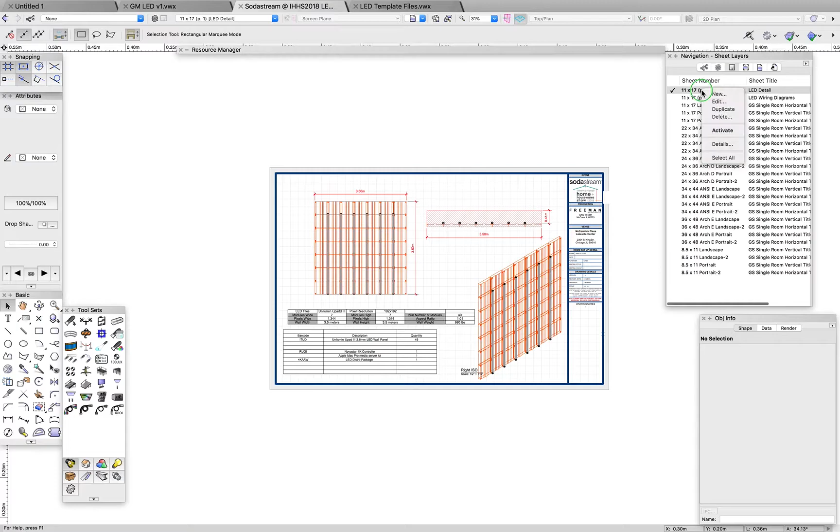To get yourself a new print sheet, you just need to either have a blank one already available, or you can always just copy over your detail drawing, right-click, duplicate, and then delete your other viewports. Nice thing about that is it'll keep the information tables in there.

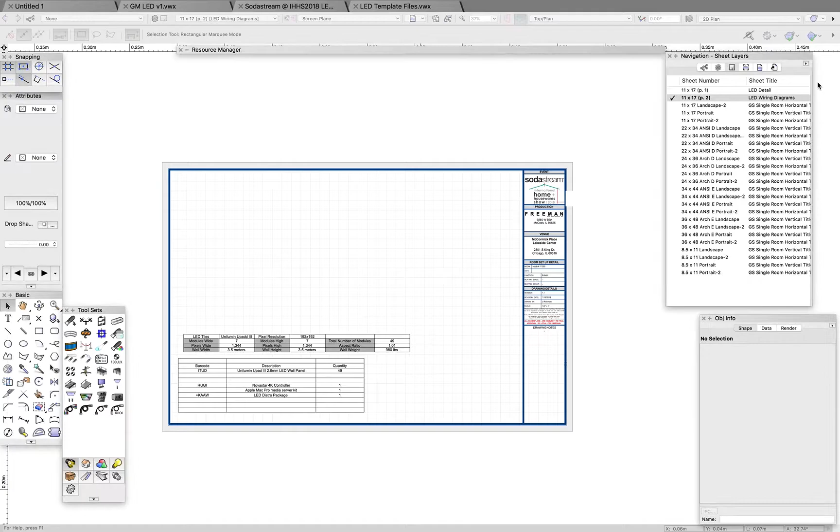So after we have already exported the image files from the Smart LCT software, I just set them on the desktop so that we can bring them into our print sheet. So just go up to File, Import, Image File. Select the first one. First thing you want to do, of course, is scale it down. So hold Shift, scale it down so it fits. It's a more reasonable size.

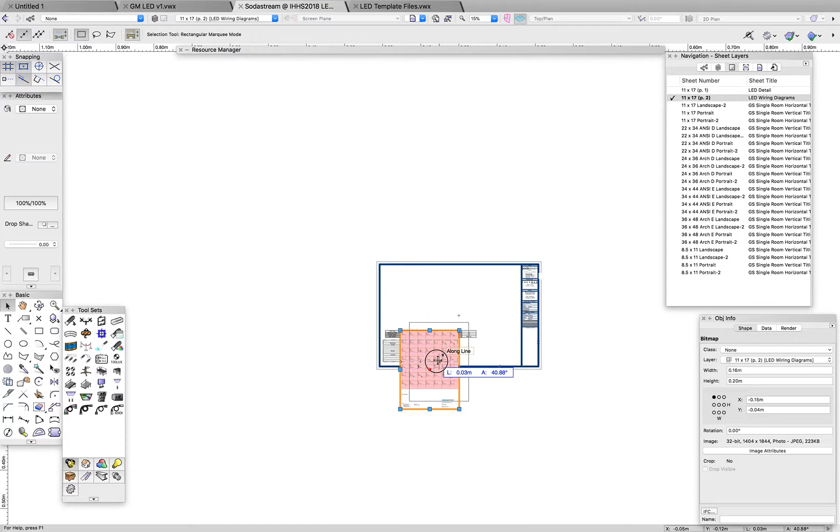You can crop these before you import them. It's just as easy to crop them after the fact. So I'm going to shrink this down a bit more. All you have to do is right-click on the image file and go to Edit Crop. You can hit the number 4 key or just hit the rectangle tool, because we're just going to draw a crop on here.

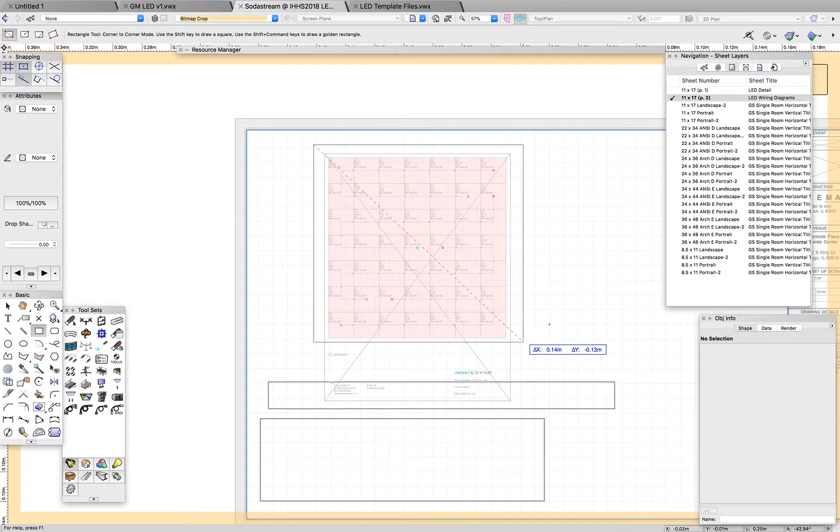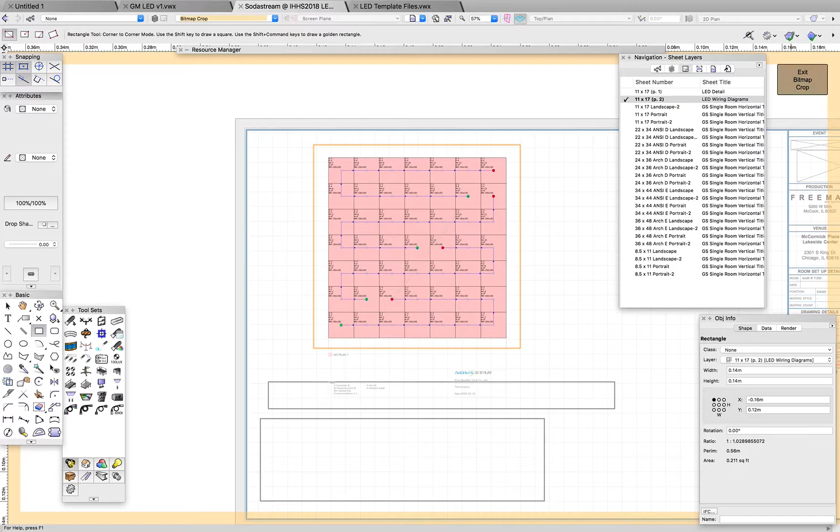Since we use the data chart as a mock power diagram, we just want to cut off everything on the bottom down here just so it shows the arrangement of tiles with the power runs. So once that is selected, just hit Exit Crop, and you have a nice power routing diagram.

Now, next thing we're going to do is to label this big and clear. And let's also indicate the types of circuits we're using. 2, 3, 4. We have 4 20 amp, 110 volt circuits.

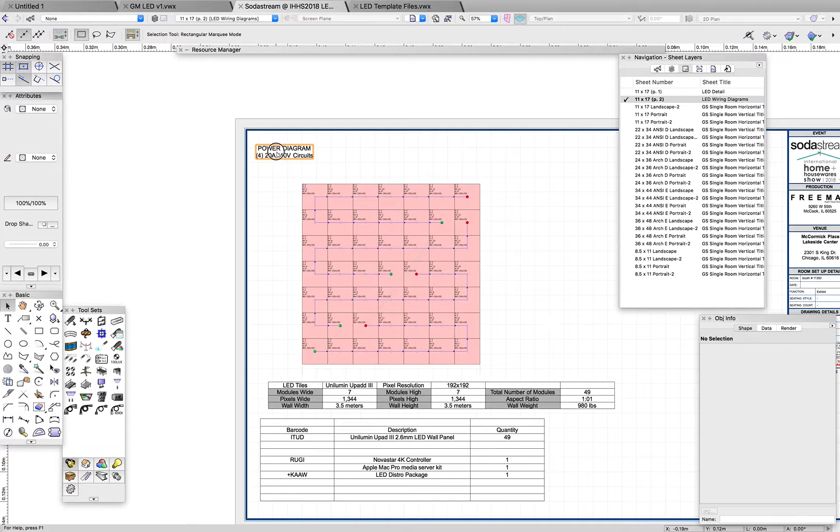Now, on this one, we can have either 110 volt circuits if they're pulling regular ones out of the floor in the booth, or if we are using our distro, we can have 208 volt circuits coming out of that through the PowerCon breakout cables.

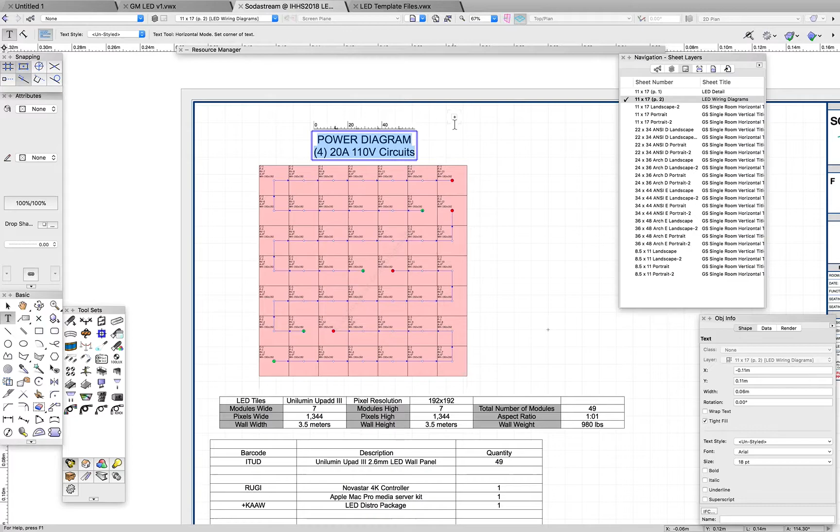I'm going to go ahead and just wire this. Sometimes we have that available, but then when you get on site, they don't want to run a full service, and it's easier for them just to get you Edison circuits. So this one's kind of right where we can go either way with the size of this wall.

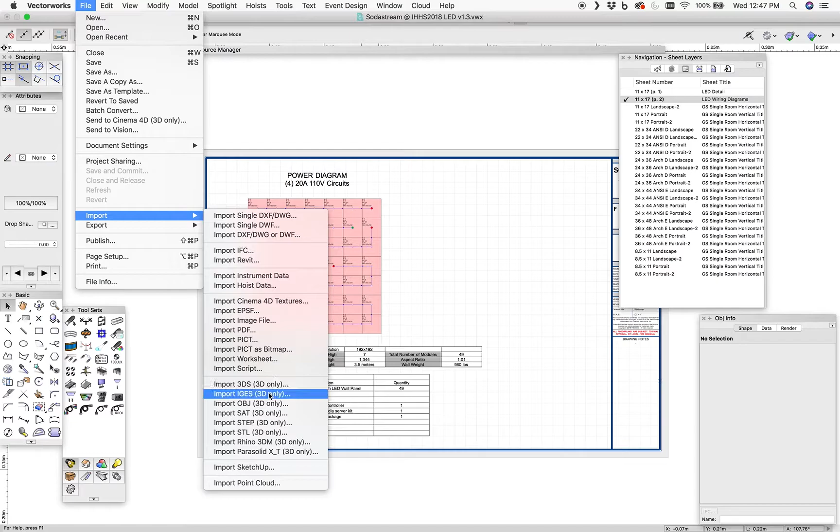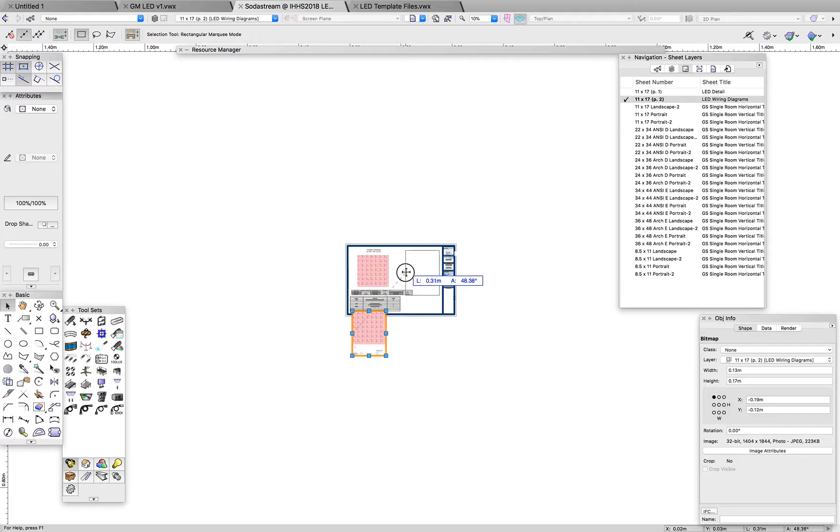Last thing is we're going to import our data diagram. So same thing, import image file. This one I am not going to crop. If I do, it'll be less. So let's shift scale that down. Drop it over here.

Let's do some rearranging so things fit. So we'll drop this at the bottom, this at the top. We don't really need that pick sheet. That's more for billing, but it won't hurt to have it there if it fits.

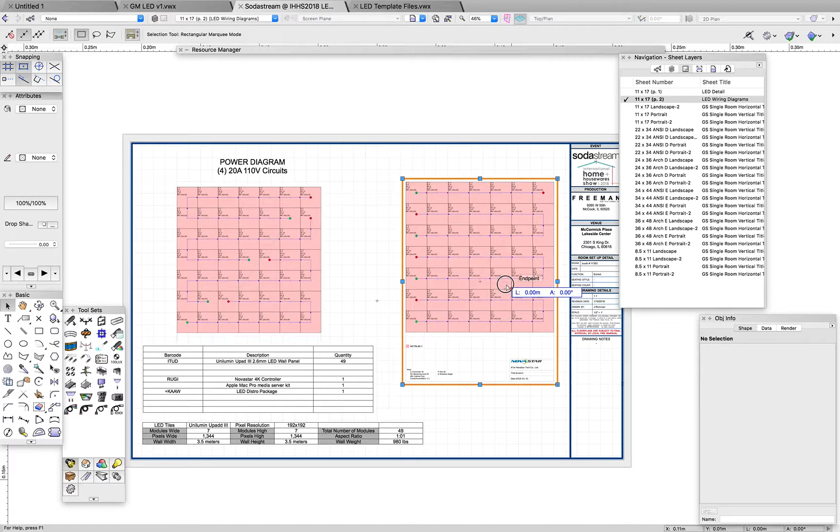This one I'm going to leave the bottom on here because it indicates the type of controller and the ports. We're able to do this one on 4 ports because we can have up to 16 tiles on a single port, but we are going above the 1080 resolution, so we're going to keep it on a 4K controller.

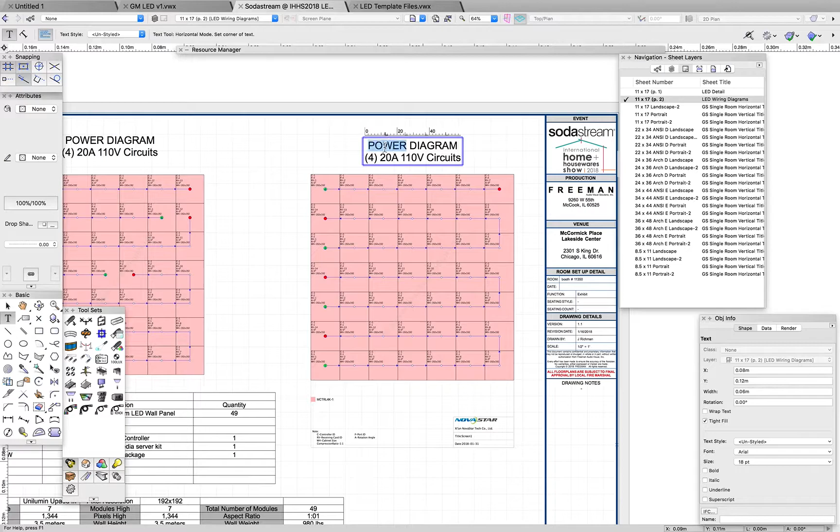With that, I'm going to go ahead and copy paste my header, or my label. Kind of shift these around so they look nice and even. Looks pretty good from here. I'm going to update my title block. Just to be accurate, I'm on 1.3, and this is drawn on today's date of 1/31.

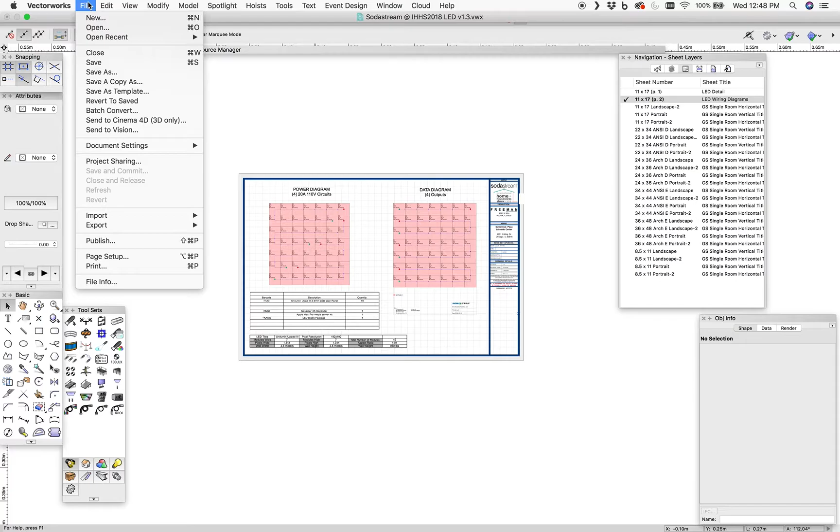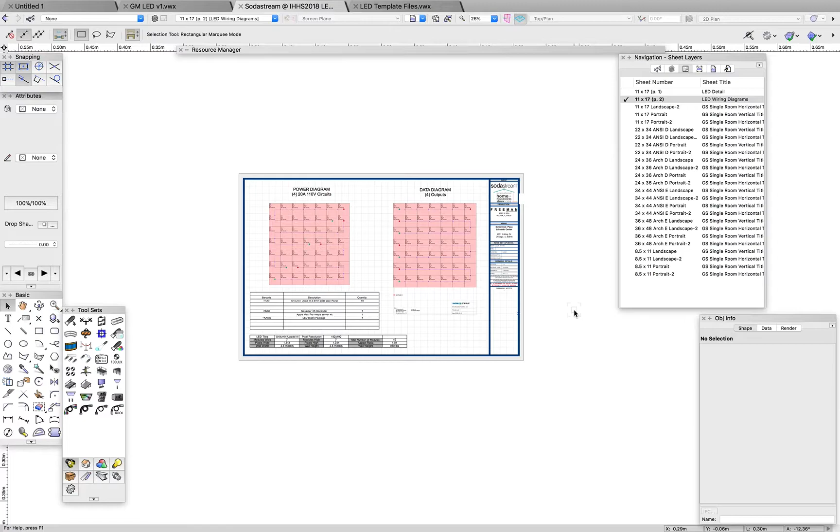Ta-da. Export that. And I'm going to throw this in the show folder. There we go. Ta-da. Beautiful. Upload that to SharePoint, send it to your show site leads, along with all the booth drawings, and you are good to go.